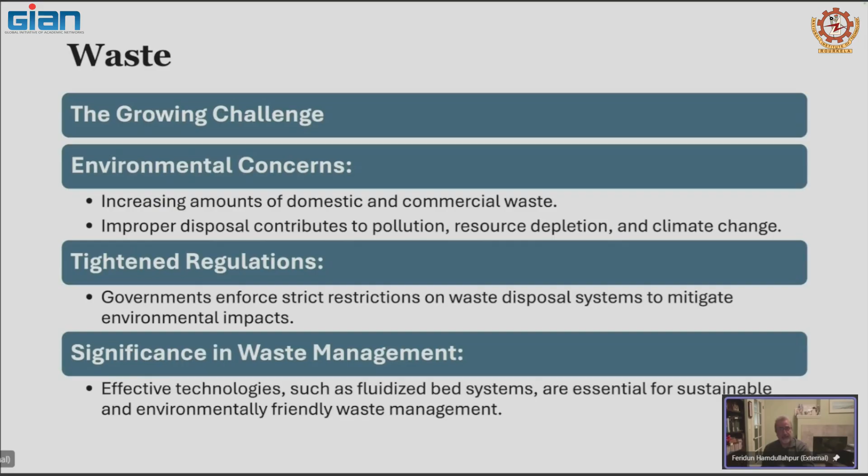Effective technologies such as fluidized bed systems are essential for sustainable and environmentally friendly waste management. It's not just to get rid of it, it has to be done in an environmentally sound manner, and fluidized bed technology offers very good options in fulfilling that requirement.

We see this growing in many countries. I have designed a couple of them for different applications in the waste management area, especially in Asian countries, Thailand and many others, where they are widely used. It plays a key role in solid waste management.

And again, as I said, through incineration it is possible to reduce the amount of waste material. And we cover this when we burn things, we spew things out into the atmosphere. There could be a lot of hazardous components, as well as large amounts of CO2. So this has to be taken into consideration as well.

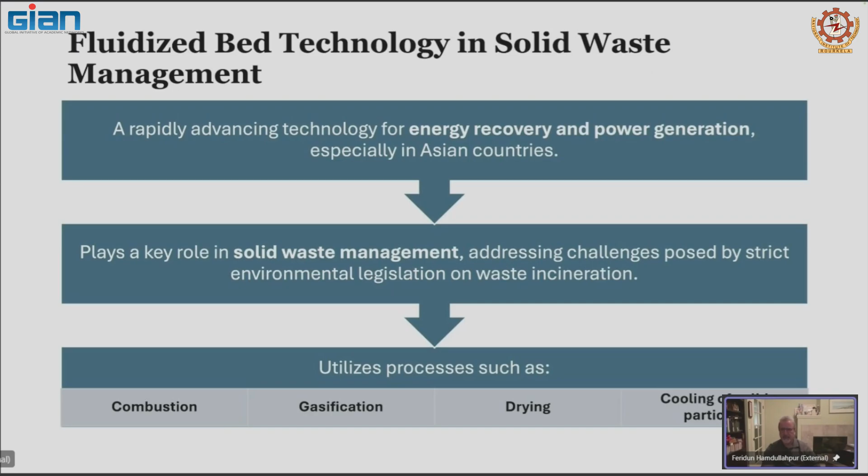There are other options available, but in the interest of time we're just going to focus on the thermal aspects using fluidized bed technology. We touched on this many times, that the processes we can embark on with fluidized beds include combustion, gasification, and drying. We covered that last night, and the opposite of it, of course, could be cooling if needed.

So what are the advantages of using a fluidized bed? Fuel flexibility is very important. This slide isn't just specific to waste, but covers a number of things we already touched on. Solid waste is one of them.

Environmental compliance, again, we talked about some very strong and practical aspects of fluidized beds in terms of emission controls, mostly in the form of sulfur oxides or nitrogen oxides, given its operating conditions and also its ability for in-situ sulfur removal.

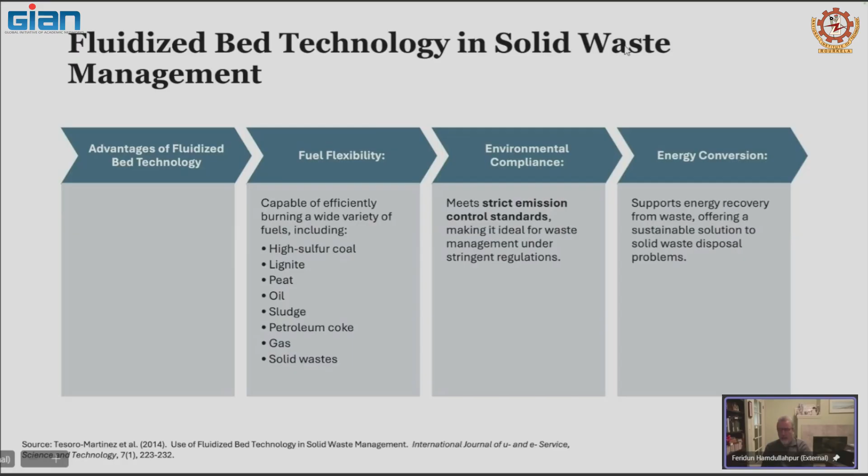And then something else comes out when you burn something. Combustion is an exothermic reaction, it releases heat, and therefore there's an energy conversion process that takes place. Once you're able to bring it to the ignition temperature, hopefully the reaction will be self-sustaining and continue burning, releasing heat throughout.

So what are the applications? Again, we've talked about this, but you can integrate this into a power plant design if possible. If it's really large and you build an infrastructure that counts on a sustainable amount of waste as fuel, you may consider power generation, but mostly it is in the form of heat that is released. If you have a large enough facility that counts on a sustainable flow of waste material as fuel, then you can build it as a power plant.

Okay, sorry about that. Never mind. Okay, let's go through this.

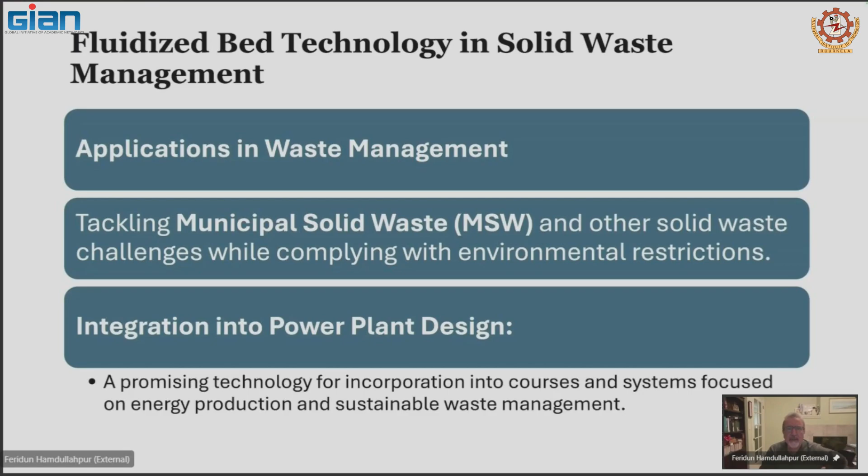We can use circulating fluidized beds successfully in incinerating waste, and at the same time do it in an environmentally sound manner, while also capturing a lot of the heat from it. If it's large amounts, we can produce steam, turn steam turbines and produce electricity, and also use it for district heating if heat is necessary.

So this is an externally circulating fluidized bed. Here is the bed, and here you have wastewater treatment plant sludge coming in. Industrial waste is being fed, but you have to use auxiliary fuel to bring the bed temperature up to the initial ignition temperature of the waste material sludge.

Gradually you co-fire until the combustion is steady, then you shut off the auxiliary fuel if it sustains itself. Otherwise you have to continue it in small amounts. As bed material, you put sand in, and as a sulfur dioxide scrubber, you put limestone in, and it produces a lot of heat.

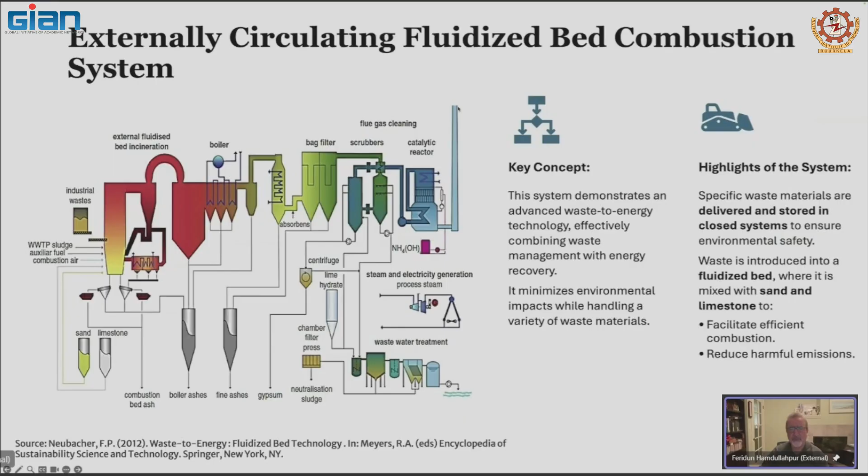For the gas to be sent to the bag filters, you will need to cool it, otherwise you'll destroy the bag filters. Then you go through some scrubbers and a catalytic reactor for nitrogen oxides, if there are any. In this case there are, because of the temperature and the waste material, so you have to ensure it's clean before it is discharged through the stack.

So this is externally controlled, using scrubbers and all the other things in order to... what could we use here?

We can use the solid residues from here, collected and treated to avoid environmental harm. Usually ash, if it's coming from a power plant, is coal ash, but in other cases, you wonder what you do with the ash. Just think about it for a second.

So you can use ash. It's one of the main filler materials, for example in road construction. It can be used as a construction material, not as the sole material, but as filler or auxiliary material. There are lots of uses for it in the construction industry.

Liquid residues have to be discharged properly, or they have to go through a second incineration process, integrating the process with capturing the heat. Environmentally, you have now reduced the size of the waste significantly, and released as clean gas as possible, within acceptable limits and standards. At the same time, you produced useful heat either for power generation, district heating, or process heating.

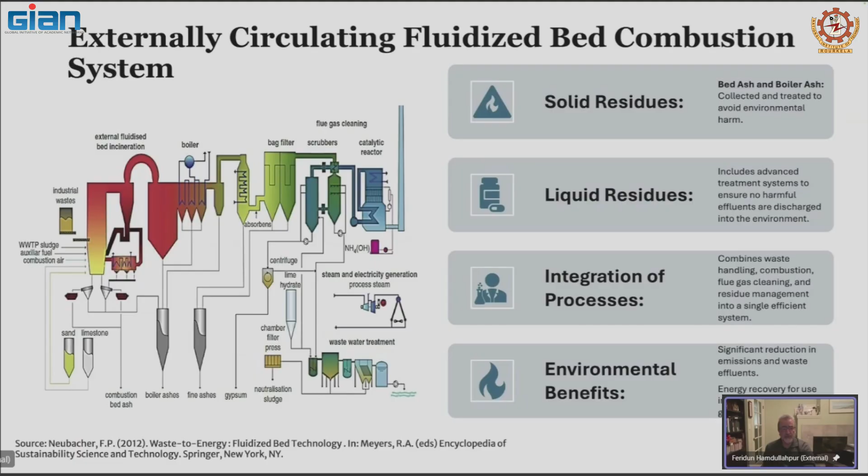Internally circulating fluidized bed, as the name implies, instead of doing it externally, you circulate this within the bed. This is a unique design. You will recall from your fluid mechanics there is sudden contraction, then sudden expansion. When the dense bed is here, gases are released with some particles, they enter into a large area, and around the wall there are recirculation patterns, and then they are thrown out and come back.

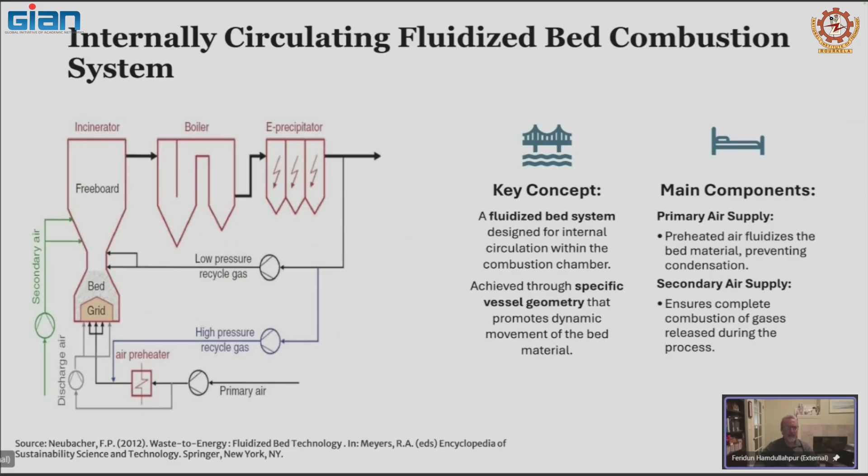So it is a very effective internal circulation system. This is for smaller loads, but it is extremely effective and a simpler design than the circulating one, of course.

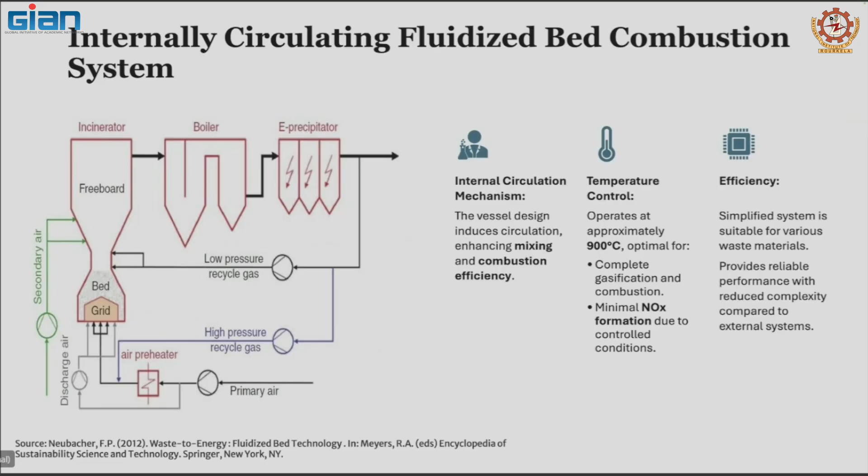Basically, the operating temperature will be around 900 degrees. Around that temperature, you minimize NOx formation. Then, as you see here, you don't have very expensive scrubbers and catalytic converters.

So what are the other kinds of incinerators or waste-to-energy technologies? Rotary kilns and grate furnaces are the two most popular ones, and they usually have different operating ranges. I will show you.

Given the rotary kiln, let me show you what it's like. This is the kiln. Its length-to-diameter ratio is usually at least 8 times length to diameter. As you can see, it is placed inclined to facilitate better movement, and of course it rotates.

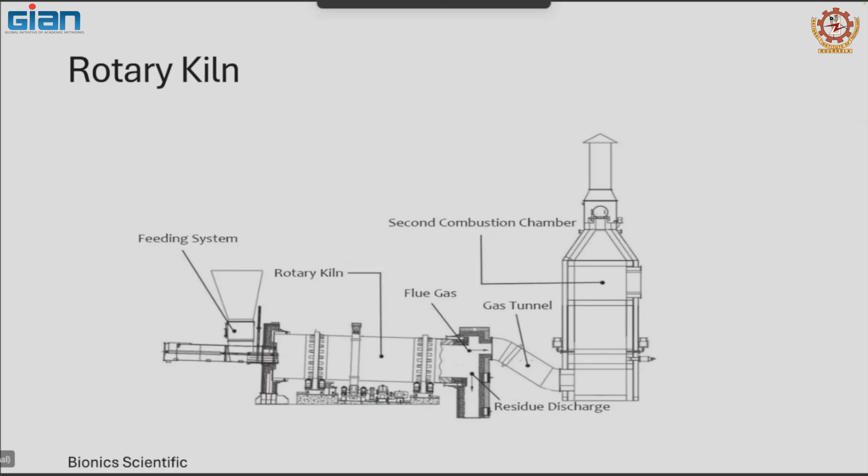With slow rotation, and enabling use of primary and secondary combustion chambers within it, you can reach high temperatures. Therefore, it is very, very useful for the treatment of hazardous waste.

Two very important parameters in destroying hazardous waste: temperature, which has to be high, and residence time, how long you keep it there at that high temperature. These two essential things ensure that hazardous waste is destroyed. You can adjust residence time, within given operating conditions, by adjusting the rotational speed.

Toxic substances, especially those considered very hazardous like petroleum coke or anything with polyaromatic hydrocarbons, have to be destroyed before anything is released. The system can handle a diverse range of materials. It doesn't mean you have to just burn or incinerate toxic substances alone; you can do it together with other materials.

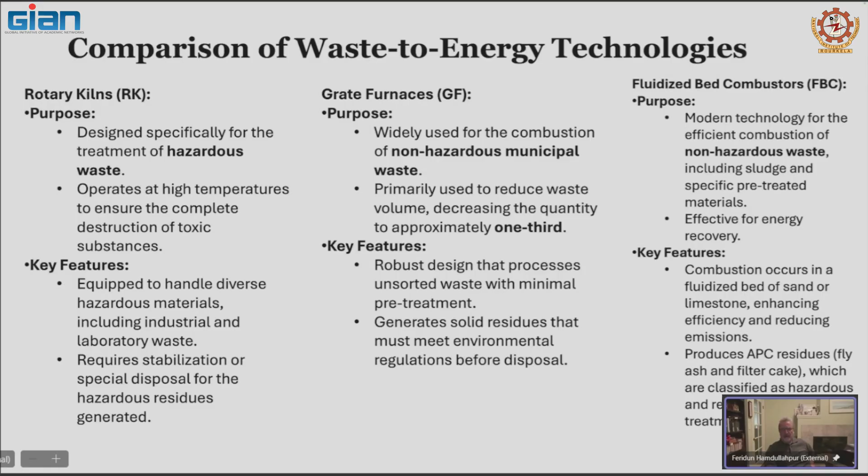Then we have the fluidized bed combustors. This is a more modern technology than those two, predominantly for non-hazardous waste, but it includes sludge and other treated materials. It's very effective for energy recovery, and you can use it to scrub the gases effectively.

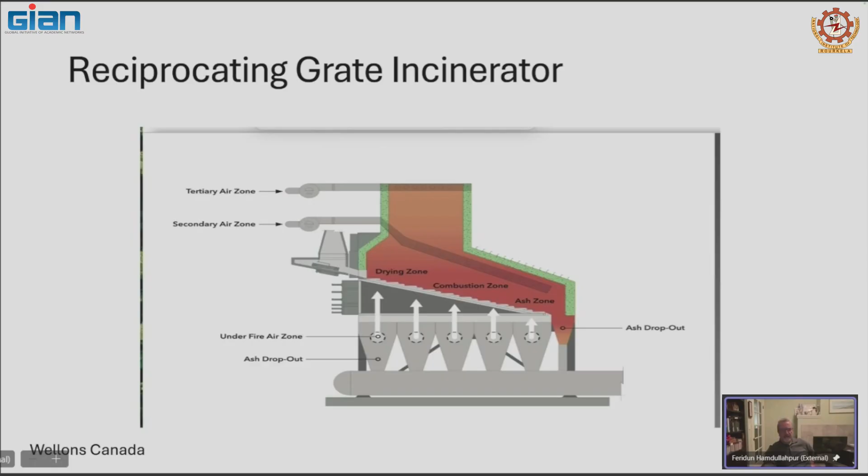That means you have to sift all the non-combustible material out, and it has to be sized appropriately. Remember what I said yesterday, group D is the largest size we can go in, around 10 millimeters. You have to ensure you don't have larger size particles. For example, if somebody throws a pair of shoes in the garbage, you can't just throw those shoes in the fluidized bed — they go through a chopper and get sized appropriately first.

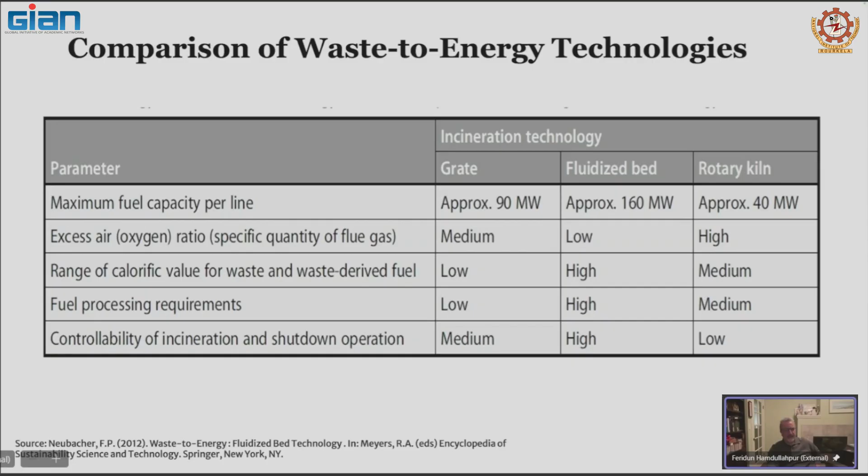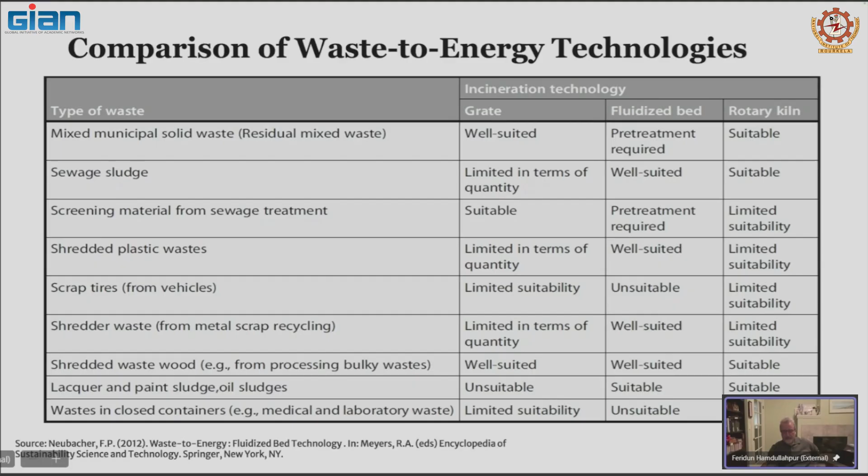These are some of the things you need to take into consideration, like what kind of fuel you can feed into it. I'm sorry, I'm passing a little fast, but I think I'm making sense.

Here's an example: an existing facility in Vienna, Austria, composed of 4 fluidized beds and 2 rotary kilns, so it covers a wide range. Rotary kilns make sure all the hazardous waste goes through them, and the fluidized beds look after the others. Look at the numbers: 180,000 tons of municipal sewage sludge annually, 90,000 tons of non-hazardous waste, and 90,000 tons of hazardous waste annually. These are significant amounts.

For energy recovery, it generates 56,000 megawatt-hours of electricity and 440,000 megawatt-hours of district heating. So it is a combined CHP, combined heat and power plant. Its fuel is waste material, and it produces electricity that feeds into the grid, plus a lot of heat for district heating, both for comfort heating and hot water.

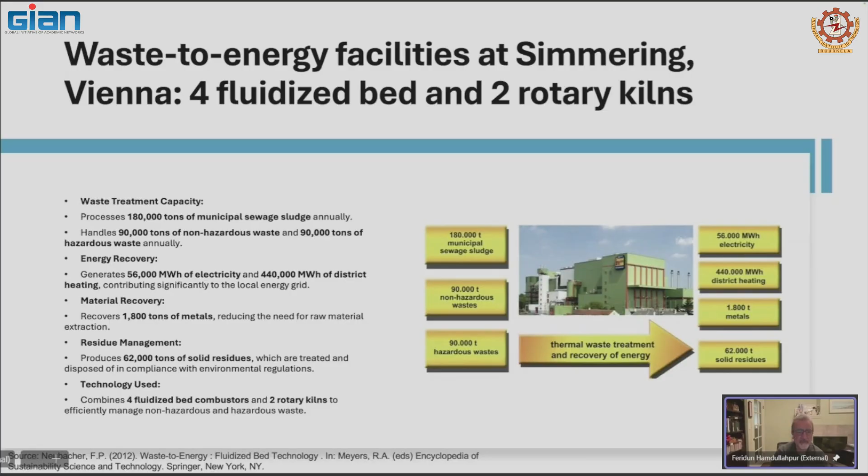1,800 tons of metals recovered through reduction and extraction. Residue management produces 62,000 tons of solid residues, a lot of which are treated and disposed of in compliance with environmental regulations. To do all of this, they have 4 internally circulated fluidized beds and 2 rotary kilns.

You're familiar with this, but as a reminder, instead of burning, you have the option of gasifying the waste material, using the same principles we discussed for coal or biomass. You provide enough oxygen to burn some of the fuel, but in sub-stoichiometric amounts - either starving it of oxygen for pyrolysis, or providing an understoichiometric amount for gasification. Gasification produces syngas, which you can use for all kinds of things. So remember, incineration is one option, but gasification is also a possibility.

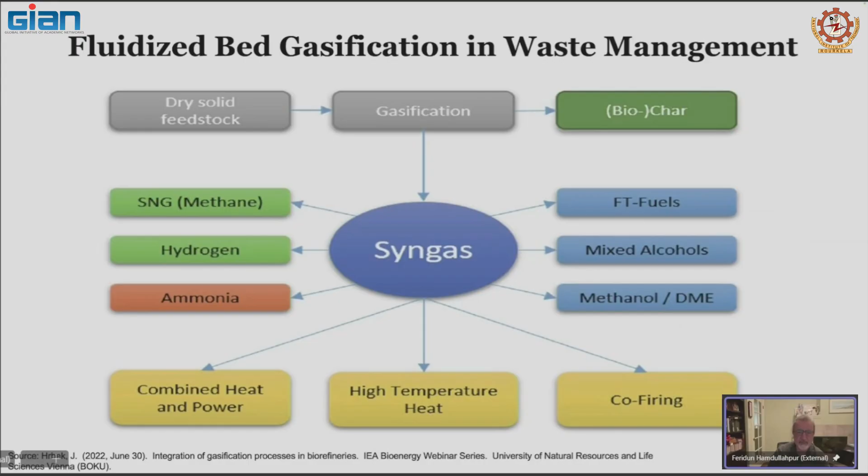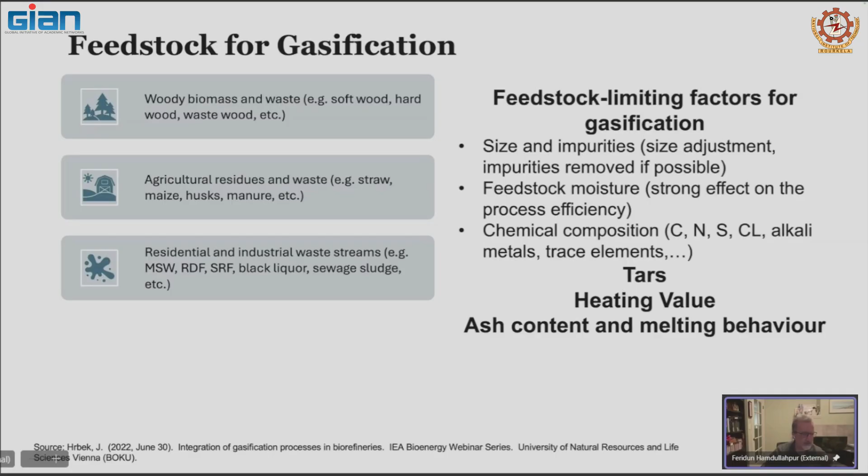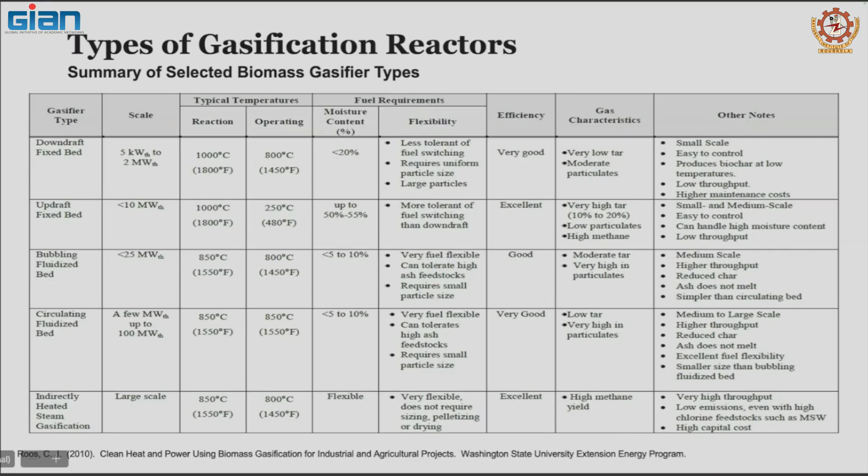In some cases there is more leaning towards gasification, simply because of carbon dioxide capture or reduction. I'm repeating what I covered in the gasification lecture, but these are the materials you can use as waste material for gasification, and the types of gasifiers, including fluidized beds. I showed you the operating ranges of fluidized bed gasifiers as well.

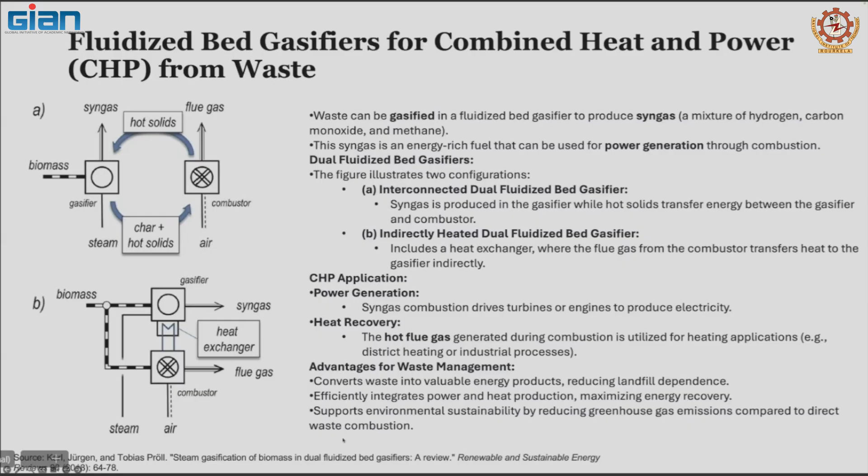For combined heat and power from waste, basically a dual system is used. You have the combustor incinerator, which you accomplish externally and utilize the flue gas. What you do is circulate hot solids - these hot solids are the heat source for the gasifier to handle waste material in the form of biomass, and you just keep going. This can be done directly or indirectly.

For methanol production from waste, you use a fluidized bed gasifier system, and the idea is that methanol synthesis takes place, followed by purification, and then you use it as fuel in internal combustion engines or in turbines.

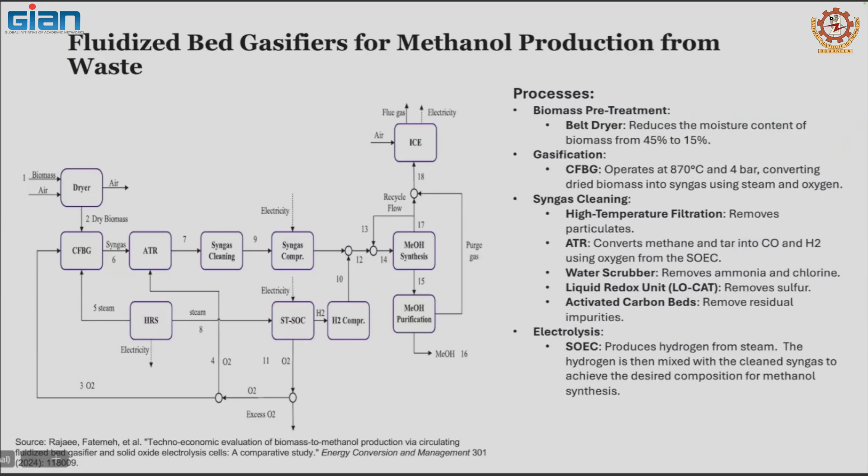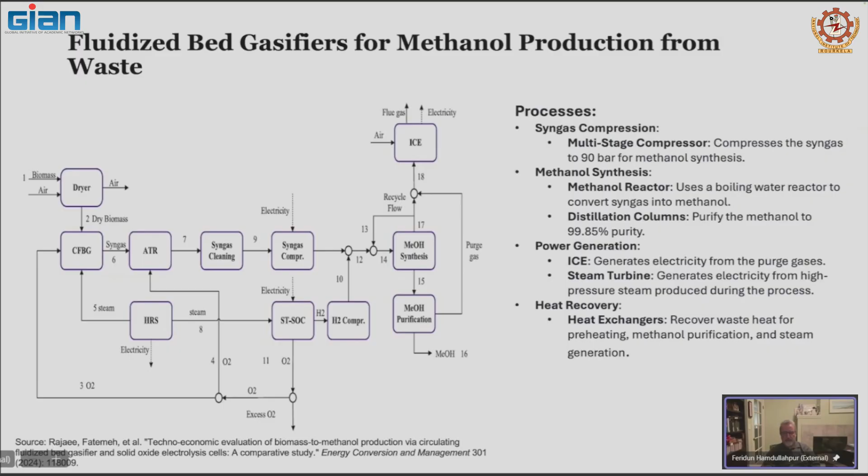This is another way of methanol production. I'm just giving these as examples of what can be used in modern day. Methanol is incredibly important because it's an energy carrier - instead of tons of waste, biomass, or coal, you put it in the form of methanol, which contains a lot of energy, but is also a lot easier to transport.

I sincerely apologize, I flew through this, but I can't continue anymore, I have to stop here. I hope this was useful. This final lecture was just a form of application, applied to waste management. I may have taken a shorter time, but I think the idea was to impart all the necessary information for you to have a good understanding of it. Beyond this, you will need to do your own studies and research to get a more in-depth understanding, together with some very detailed calculations. They are all available. I wish if we were doing this as a 3 month long course, we would have covered all of this in detail, but nevertheless, I'm going to show you one resource.

It is heavy - if you can see this book, it's called Steam: Its Generation and Use. This is incredibly useful, done by a boiler manufacturer called Babcock and Wilcox. See if it's available at your library - if I were there I would have brought it, it's quite heavy. But this is absolutely the most detailed, fundamental book for a lot of the topics we covered, and it covers a much wider range of systems, including very detailed fluidized bed systems.

With that, I apologize for cutting it short, but I think I have accomplished the objectives given within the list of contents of this course. I wish you all the best, and thank you for your attention.